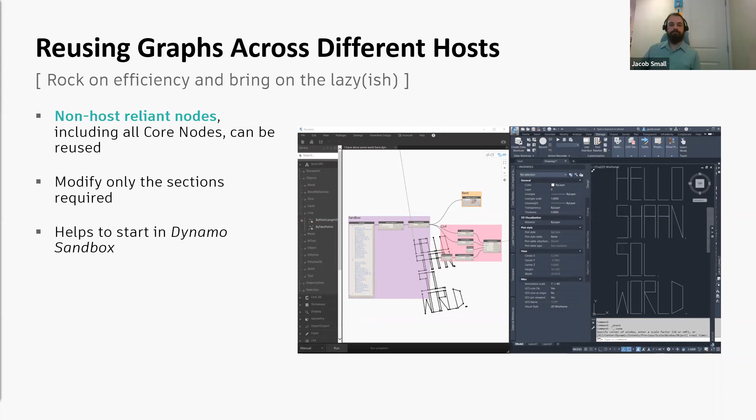And so if we're talking about moving stuff between things, typically this is usually geometry or data. But when you specifically want to map or move geometry between different things, what happens when it's created in a different way? So there's a few gotchas inside of hosts. Geometry can come from many different places, but may not be compatible. We touched upon this earlier. For example, things might be called mesh as a macro name, but a mesh coming in from Dynamo Sandbox and a Mesh Toolkit mesh are actually different meshes. So they require a translation to happen for them to actually work together.

So both of them are meshes at the tail end of that class tree, but they are different higher up, which means the functions that work on mesh are not going to behave on both of them. They're simply going to fail if they don't recognize the exact mesh typology. But there's different ways that you can translate between things. So type translation can happen, such as the node that Dimitar has, which is awesome.

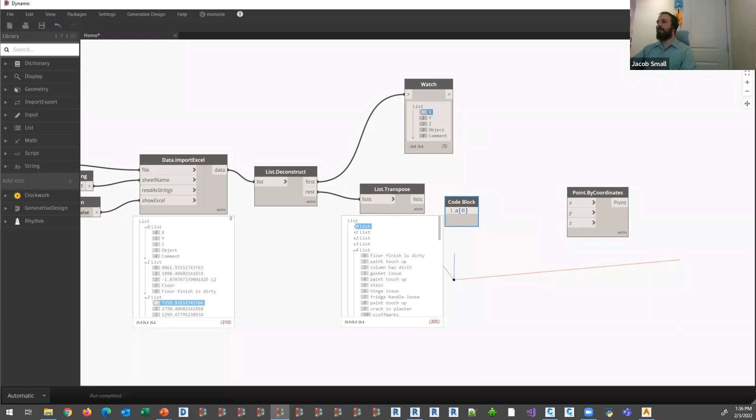So we're going to use a code block here. We're going to define the variable A and say from the variable A, get me index 0. We'll wire that in. And here's just my X data, right? Well, we also want my Y data and my Z data. XYZ, there we go. Wire this in, and oh, we've got a warning. What's this state? Geometry working range.

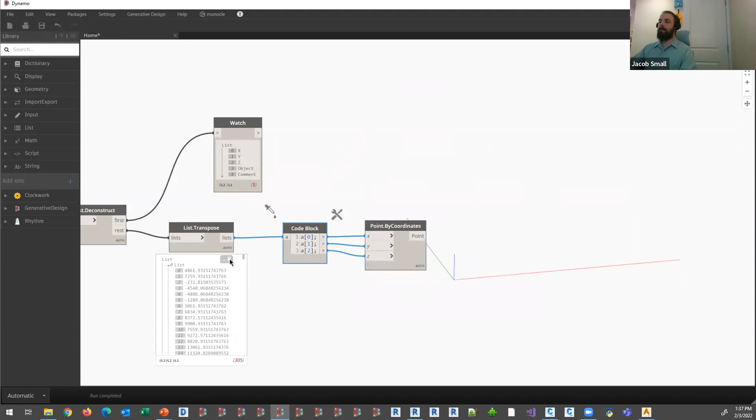All right, so this is something that comes up periodically. Sometimes this is the right thing to do, sometimes it is not, depending on what your host is. I'm going to go up into my settings and change my geometry scaling here to large in this case, because this is the right thing to do. And notice the warning has now gone away. Everything is happy. And as I'm wiring these in, we're starting to see some points. The reason this is a problem for me is I'm currently measuring in millimeters, which puts things pretty far out there. Let's look at what that content is. And there's a lot there, right?

Now, because I've got points, we can't necessarily host a point in Revit and some of our other applications. So I'm going to create a sphere by center point and radius. And we're just going to leave this down at the origin. If you ever get lost in a big data set like this and you need to find a piece of geometry, if you highlight it, go to your geometry background preview and then zoom to fit, it's going to bring you to where that is, which is really handy.

We need to set a radius on this, and let's see if that radius makes sense. So that is a 1 millimeter sphere. That's probably too tiny. Let's bump that up to 75 millimeters. Maybe that's right. Yeah, that seems like it might be visible. It might not be too overwhelming. And then we're good to go.

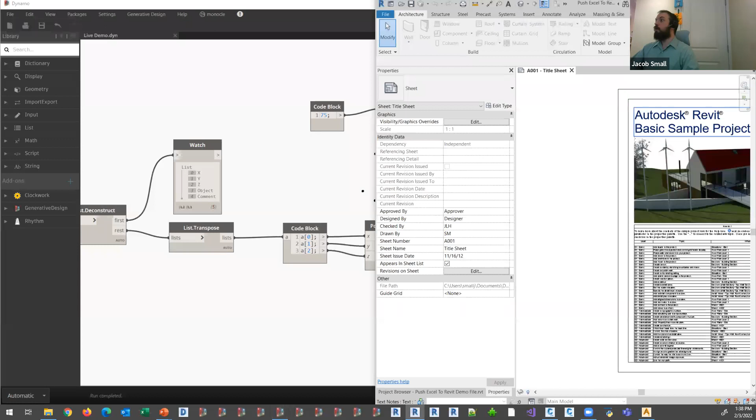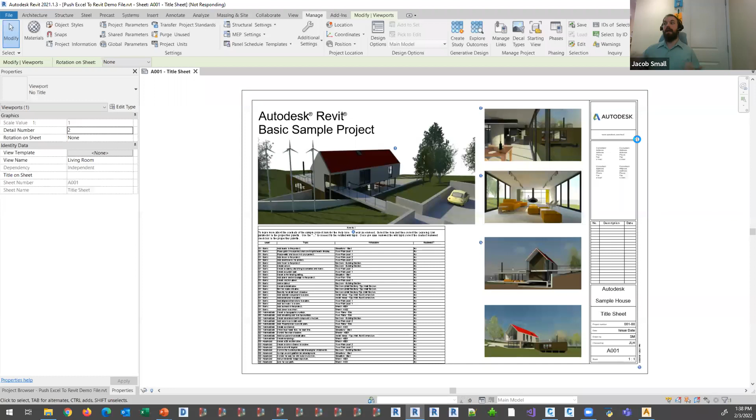So now I'm going to save this graph, calling it live demo. I'm going to leave that open because, again, we've queued up the danger music. We're popping over to Revit. From here, I'm going to launch Dynamo for Revit. The way we do this is click on the Manage tab, and then we go into Dynamo. It takes a minute to spin up because it's spinning up Dynamo just like in Sandbox, but it's got to open all those connections into Revit and all those DLLs that it needs in order to do its thing.

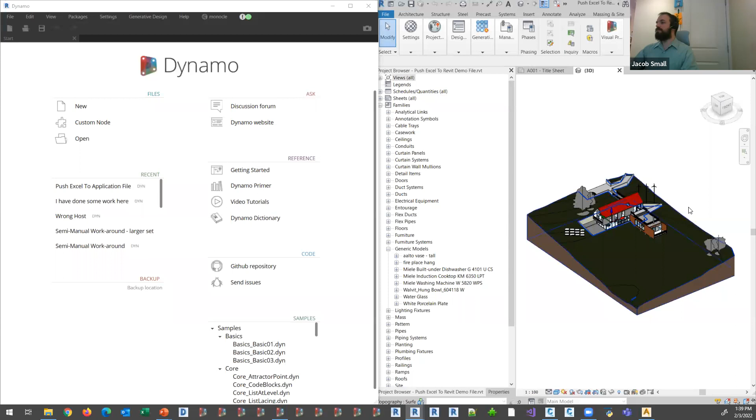If you're familiar with Revit, you probably recognize this project, but in case you don't, this is the basic sample project. We are going to open our project browser, look under generic models for some magic we're going to show here shortly. And then I'm going to zoom in on this area in our 3D view. I'm always going to have Revit on the right side of the screen and Dynamo on the left when we're talking about Revit. All right, so I'm now going to open the live demo file, which I'm in the wrong location.

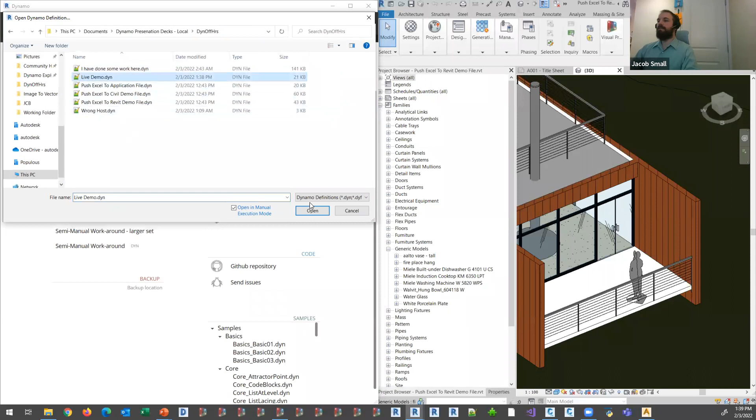Let's go to that location. There we go. Windows V to get that handy little shortcut of everything that's been in my clipboard history, which is pretty handy. And then I'm going to just open up that live demo. Again, it's the same file that we saw back here in Sandbox, which I'm going to leave Sandbox filling the entire screen. So we've got our sphere, we've got everything else. I'm going to go ahead and hit run.

And then I'm going to do a real quick file save as, because while we want to live dangerously here, I want to be careful too. We're going to save this as Revit. So we're in a different file now. And now I want to start to figure out how could I make a new family type. So we're going to do a family type by geometry node. And this takes an input of a solid geometry, a name. I'm going to call this punch list point.

Category. So we need to choose what we want to file this under. We're going to search for categories. There it is. Place this as, for now, just a generic model. Needs a family template. The easiest way to get a family template, if you ever need to find a path and you're in Revit, just go File, New, Family, and then navigate to the family template you want to use.

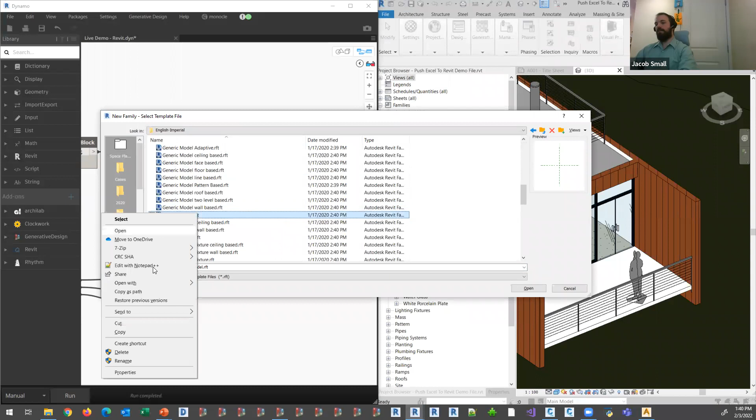Hold down Shift on our keyboard and right-click, copy as path, hit cancel, string node, and then paste. And that's going to take me right to that path for the family template. That works in any application. It's not unique to Revit or Civil 3D or anything like that. So handy little Windows tip for anybody.

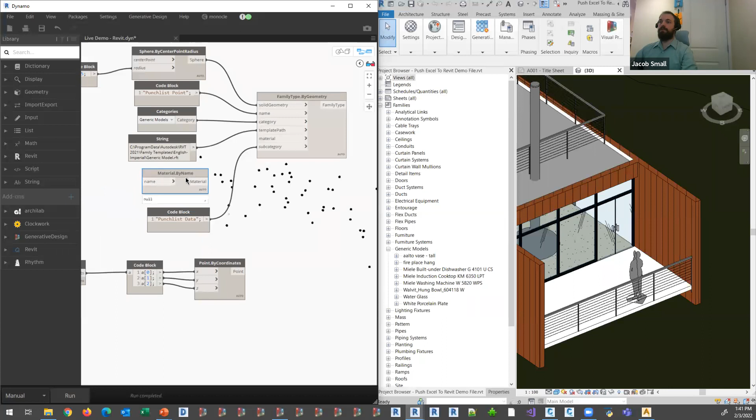We then need a material and a subcategory. I'm going to start with the subcategory. I'm going to call the subcategory punch list data so that I can turn this stuff off and on if I don't want to see it in some of my other views. And now we need a material. We're going to do a material by name node. This node takes an input of a name and an output of a material. Our name is going to be default.

Now, when I run this and wire it up, it's going to make a new family type. No instances, but we should see something in here called punch list point. There we go. Now it's time to make our family instances. So we've got a node called family instance by point. Again, this is an out of the box node. We'll take our family type as our first input, our point as our second input, and then I'm going to hit run, and we can watch in 3D space as new content's added to the model.

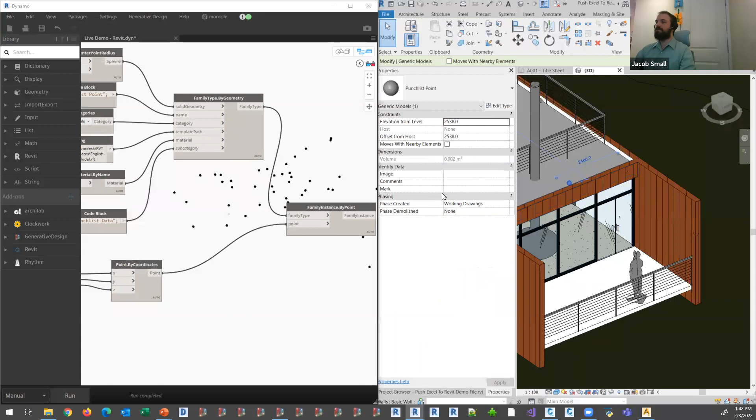Right, that happened real quick, right? We can hit undo and put that stuff back if we wanted, but let's go a step further. Let's take one of these family points and let's check out its properties. We don't have a comment on it. We just know that there's a problem here. It'd be better if we could, I don't know, set the parameter. Whoop. Set parameter by name for these elements, the name comments. Spelling matters here.

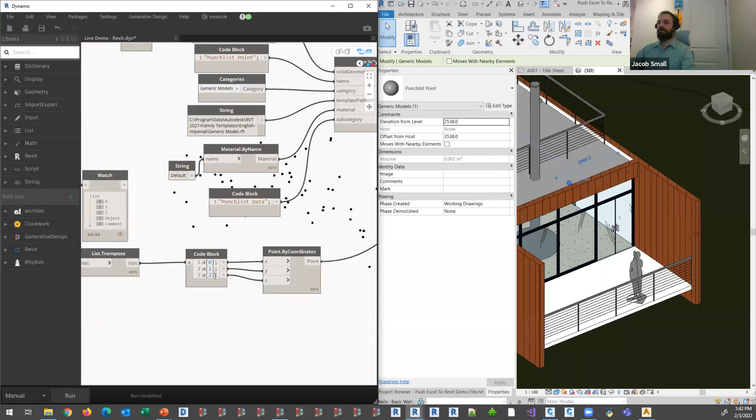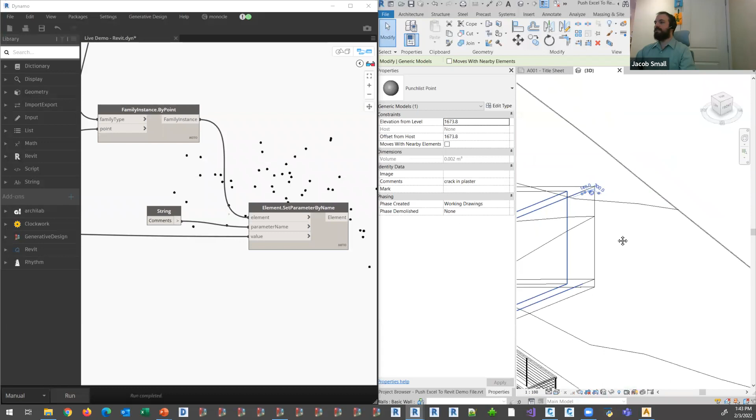And then values. And if we think all the way back here, I had my comment right there at index 4. So let's take this data and go to index 4. We'll wire this in, hit run once more, and then watch that comments field. Flashing is exposed, right? And we can do this, we can go through and we can look at every single punch list point. If I go to wireframe, we can really start to see this stuff. Crack in the plaster, turbines rusting, whatever it may be.

It's all just a matter of doing that initial data gather, right? There's paint touch-ups and everything else. You know, it looks like there's a stain on the floor, whatever the content may be, paint touch-ups all throughout the model. And this, because it's a native Revit element, I can now schedule it. I can now assign it to somebody. I can now keep track of it inside my model environment, which is pretty nice.

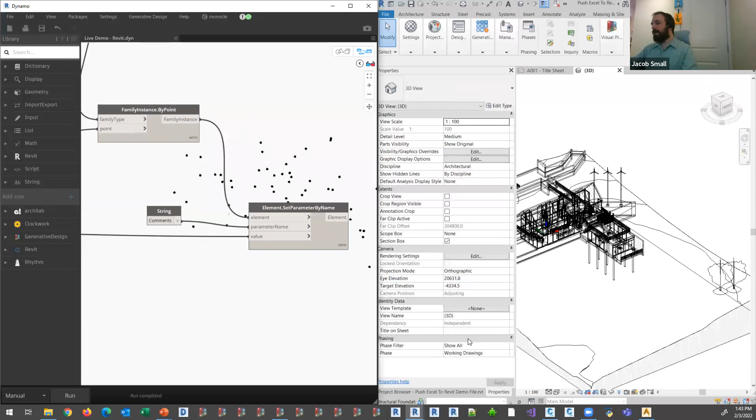All right, so we're going to save live Revit and we're going to bounce now over to Civil 3D. We're keeping everything else open just in the name of time. So you can see this project probably looks pretty familiar, right?

Hopefully we're going to see exactly the same thing once I wrap this up. So once again, to get to Dynamo within our integration, we're going to go into the Manage tab of Civil 3D, and then we are going to launch Dynamo. Takes a minute to load this up. The graphics is a little bit strained at this point. I don't know if anybody saw how difficult it was for us to keep that content kind of running.

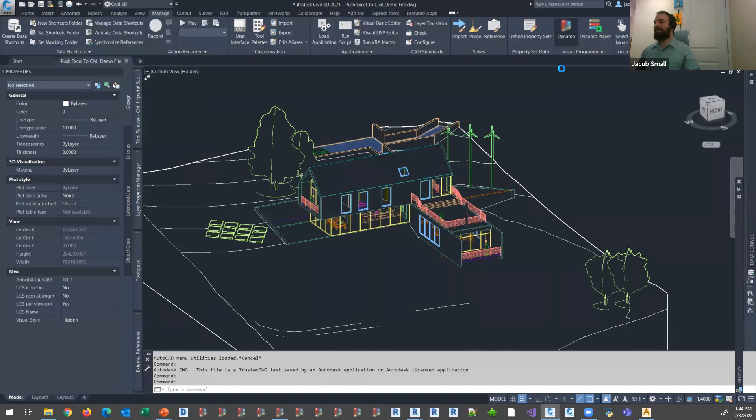We'll glance at the chat. There are a lot more issues than just what I pointed out in the sample project, David. It's got some construction concerns. We'll put it that way for now.

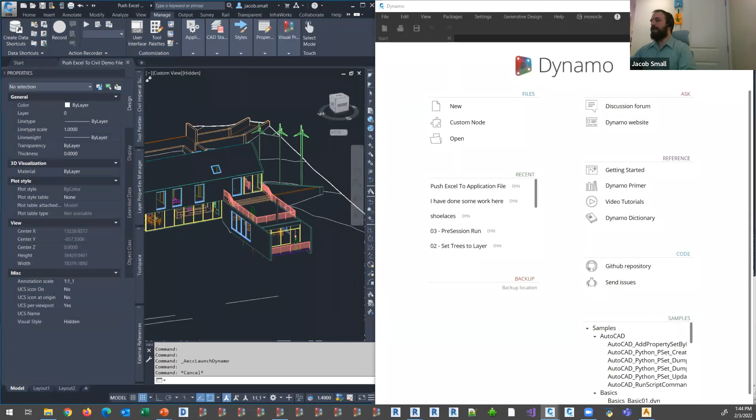So back in Civil 3D, I'm going to pull this off. When I'm in Civil 3D, we're going to keep Civil 3D on the left, Dynamo on the right; Revit on the right, Dynamo on the left for Dynamo Revit; and Sandbox fills the whole screen, right? I'm once again going to go in here and say open, and we are going to navigate to the correct folder. That is not the correct folder. This is the correct folder. I'm just going to go ahead and copy that because that's going to be the next thing I need. And live demo, open it up.

Right where I left it off in Sandbox, no changes there. We're going to go File, Save As, live demo-civil. And now we've got a few hoops to jump through in order to get this content, because I don't have block by geometry natively. We've got block reference by geometry, which is actually in the Civil 3D toolkit. And I always have to dig to find this because I can never remember what the name of it is. Block reference extension, or is it block extension?

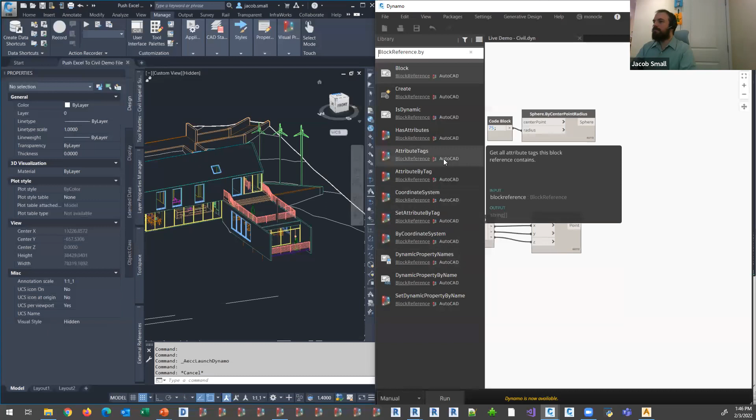Joys of live demo. Yeah. The coordinate system. The prime opportunity for any Civil 3D user. Shout out in chat if you know what Jacob's looking for. Civil toolkit. It's under AutoCAD. Block reference extension. Am I in the wrong Civil 3D? Objects, block reference.

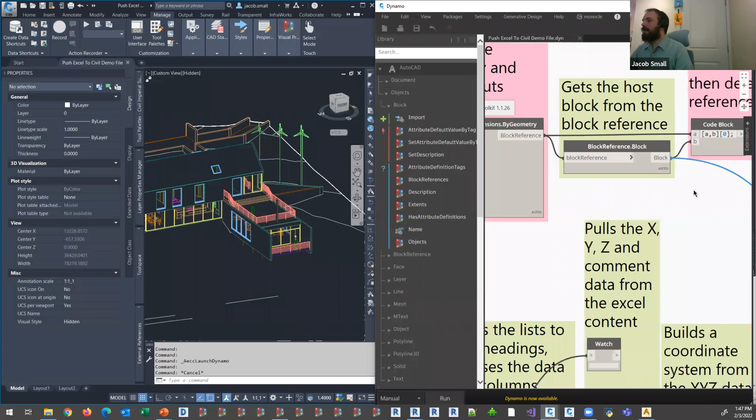All right. I'm gonna cheat and we're gonna have a peek at how I built this before, opening up the civil demo, and block reference extensions by geometry. It is there. All right. We'll close that out. And now I'm going to just go back to the live demo.

All right. So similar to how we had to make the family type, we need to make our block reference. This is the actual piece that we would insert if we went into the insert tab. So we're going to place our geometry first. It then needs a location. I'm going to use the identity coordinate system, the global coordinate system, to just place one at the origin because there's no block by geometry. We have to sort of create the reference first. It needs a name. We'll use a string node for that.

Just like before, punch list point. And then this is ready to run. I'm going to put this on a layer though. For now, we'll just put it on layer 0. Actually, no, put it on punch list point as the layer, just to show that we've made some changes here. And then it needs the block that we want to host it in. In this case, we can leave it null because this custom node does take care of that for us. We'll use existing as false, and we'll use append as true as well.

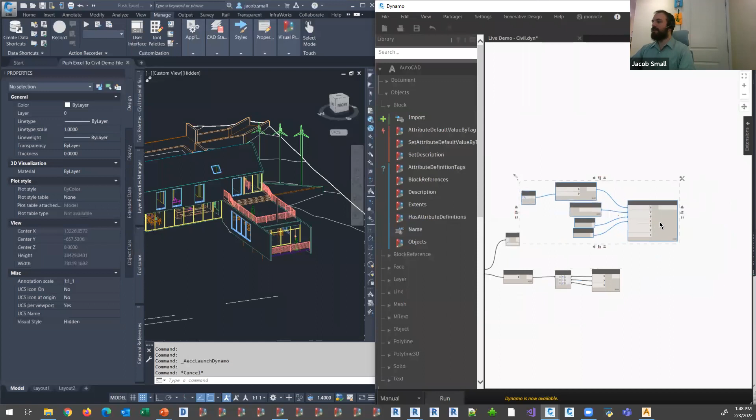I'm going to hold down tab to grab this entire chain to give myself a little bit more room. And then we'll hit run. And when I do this, if we pull open our layer manager, we should see, there we go. Punch list point has now been added into my list of layers.

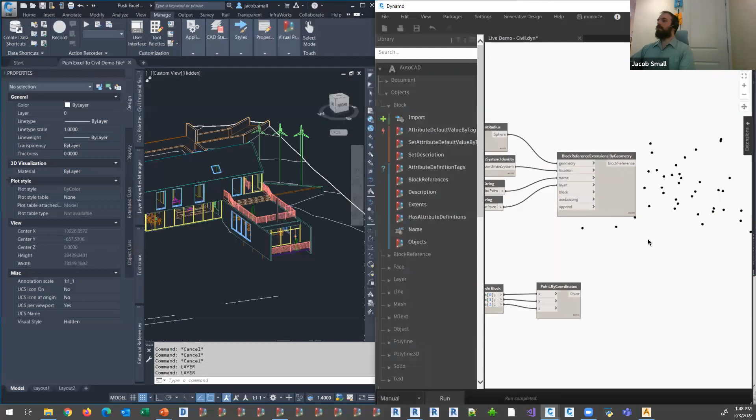All right, so now with that, we've made our block reference. We do have a physical block at the internal origin. We don't necessarily want that though. We just want the block type. So I'm going to define a list of A and B. And then I'm going to take A out of that list. A is going to be my block reference. B is going to be our block reference block. So this is the block that is put in place by the block reference by geometry node.

And then I'm going to use an object.delete node to remove that from the project. I still have the block reference, so we can reuse this though, which is the important bit. Nothing was voided out there, and this still has my block, so I am good to go. We can now create a block reference by coordinate system. Here's our source block. We need a coordinate system.

Helps if I spell this right. Coordinate System by Origin. I can't spell today, we'll just grab it the manual way. It's under geometry, abstract, coordinate system by origin. Origin, there we go.

It needs a layer that it wants to place on. We're going to use that same layer we used before. Punch list point.

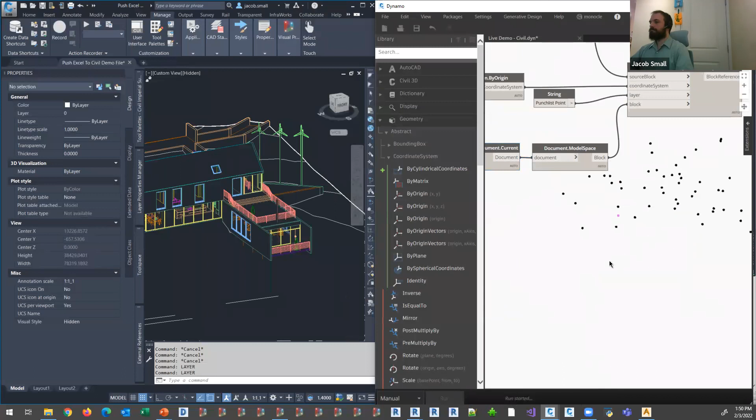And it needs a block, because in Civil 3D and AutoCAD we could place it in model space, or we could place it in paper space if we wanted to. To get the model space, there is a model space node, which requires a document input. And there is a current document node, which looks like that. And all of my punch list points have now been added into the project.

All right, so now we have to start to add our parameters to this. The way we're going to do that, we need an Object.AddPropertySet node. There we go. This takes the block objects, and now we need a property set name.

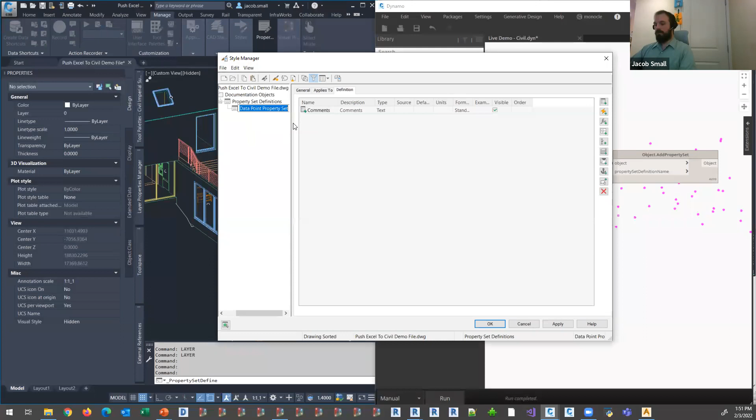The name I have is... I can never remember what I set this up as. Rename, copy, paste. There we go. 10 minutes left.

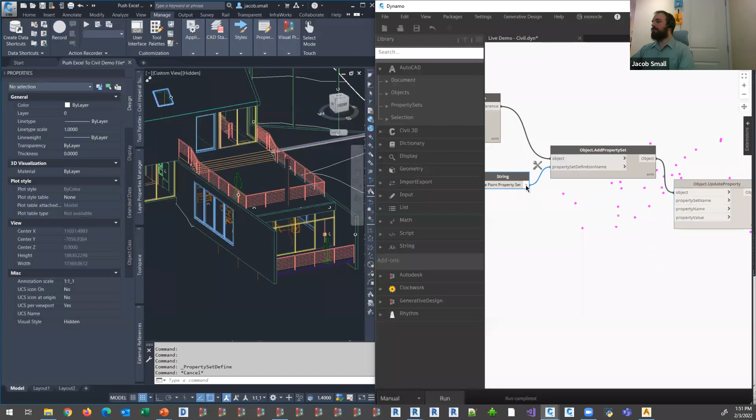We've now attached the property set to there. Now the next thing that we have to do is we have to update the property, which takes the object, the name of the property set which we have here, the property name which is comments, just like before, and then the property value.

And once again I'm asking Excel to give me that data. Index 4, wire this in, and say go.

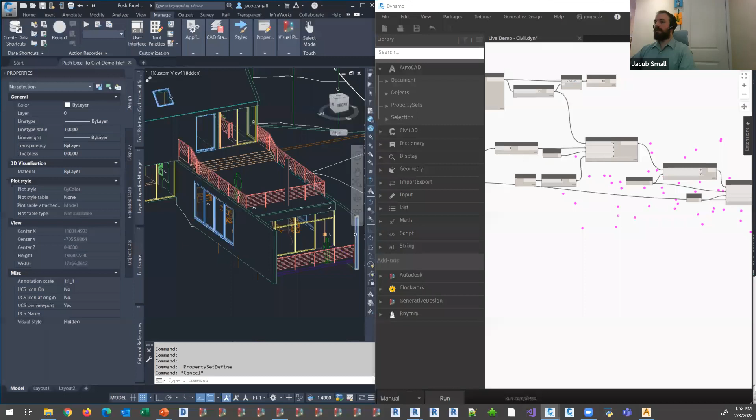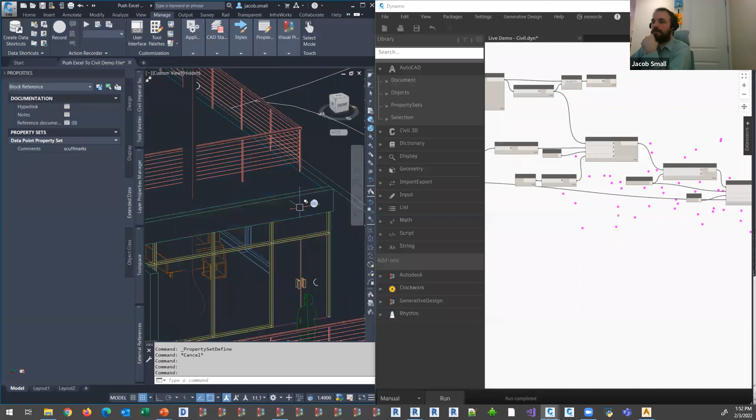So now when I select one of these pieces, and then go into - sorry, clicked the wrong thing there - extended data, scuff marks, uh-oh, that's not great. This one I think said flashing exposed for one of the ones that was up here on the roof before, not that I can see it because it's buried behind the wall. Flashing exposed, and what was it, the rust on the turbine?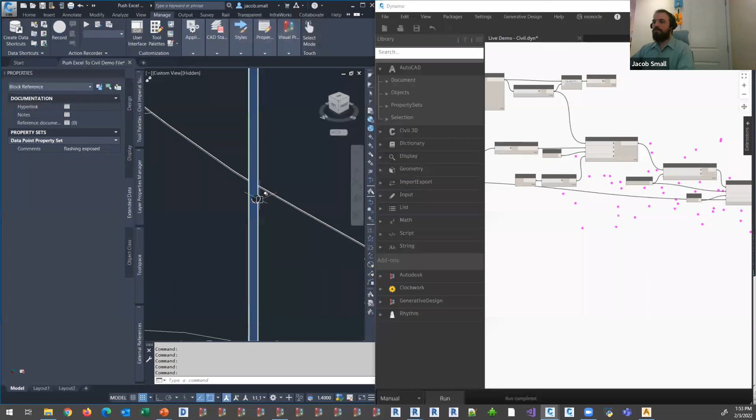We're popping over to Alias. Alias is unique, and it's the first one that we're going to show off today that runs completely out of process. It's also unique in that I'm not going to bring the Revit sample model over into Alias. Sorry, it's just asking too much of my system all at once. I did try, it didn't go well.

All right, so from here we're in our file. First thing I need to do is launch the Dynamo extension, which in Alias is under the transform palette. Now from here I'm going to go ahead and say open, and we're going to go back to that path that I have in my clipboard. Live demo, open. And then right away we'll do our save as.

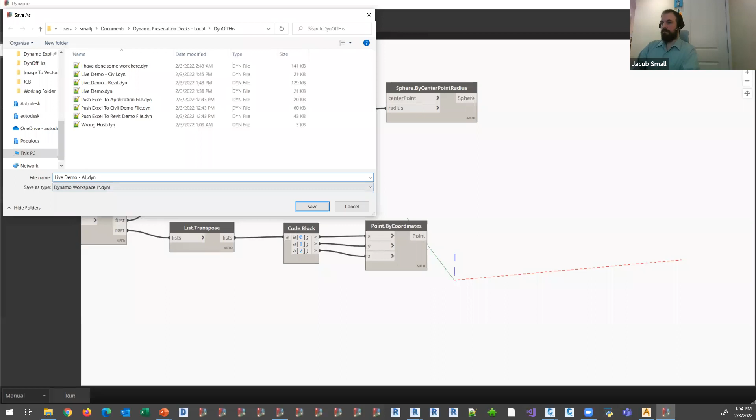And now with Alias, there's not really data, it's all about form, so things are going to be a little bit different here. What I want to do is I want to be able to sort of place these spheres as individual pieces, and then we're going to bring the surfaces, all the spheres, over into Alias. So to do that, I'm going to take my original sphere and need to transform it.

From my geometry to a coordinate system, right? I'm going to go ahead and hit run, loads up the Excel data. Now I have a point, but I need a coordinate system. There we go.

And now instead of points, I have spheres at all those locations. And now I can send to Alias.

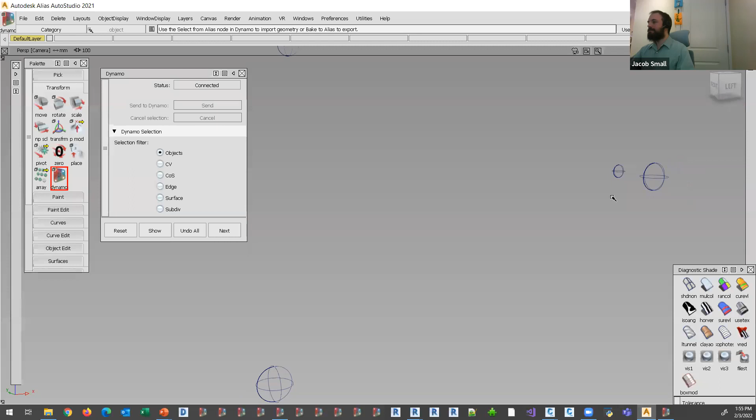And this is a really great node, we're going to pull Alias to the left and down. What I like about this node is when I hit run, if I've got a really complex surface, you get that little bar and it lets you know that stuff's happening, even though you might not actually see it, which is pretty cool. And then over here in Alias, I can never remember how to navigate. There it is, you can see all of those spheres have been pushed over.

Now again, there's not really a great way to move over the information associated to them, about this was a scuff mark, this was an exposed flashing, et cetera, et cetera. And you can tell I'm operating at a very different scale than Alias wants me to, based on the amount of time it's taking me to scroll around there.

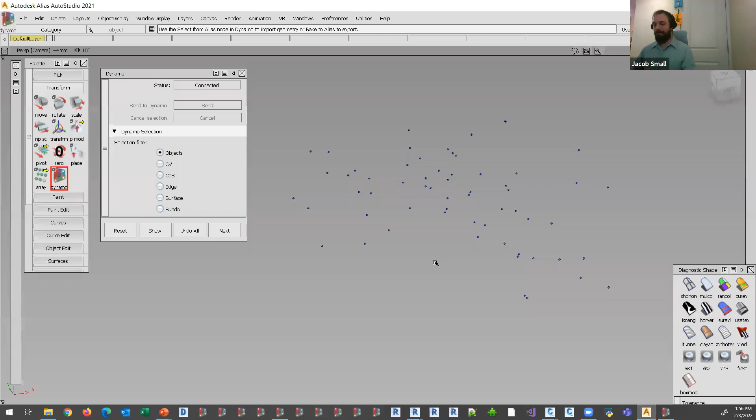But the content all got moved over. So we've effectively shown that you can reuse that same graph, move things around, and not have your system blow up in the middle of a Zoom webinar. So yeah, my Alt tab menu has way more than I'd like to present with at any given moment at this time. So hopefully you guys got some good tips out of that.

And I know Sol has been doing a great job of answering questions from the chat. Is there anything we want to surface, Sol? I think we've answered most of them. Apologies to everyone that we ran up on time on this one. If you do have any further questions, please feel free to post them in the community conversations link that you signed up for this from. We'll be able to answer those questions there and then come armed with them next time too. We should have a shorter demo next time maybe.